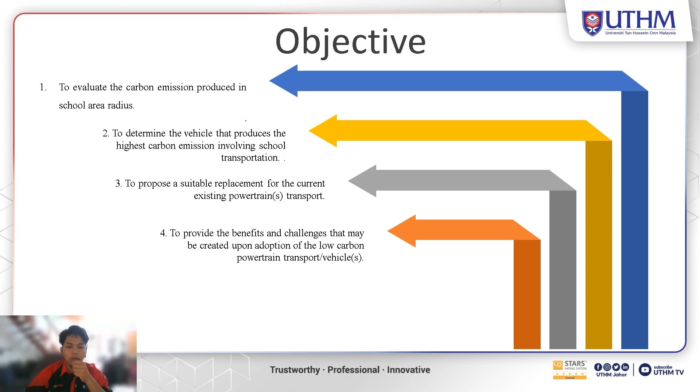Next, for the scope of study, the study focused on transportation practice at Sekolah Kebangsaan Pintas Puding located in Parit Raja, Batu Pahat, Johor. Data collection involved on-site observation and verbal interviews conducted during consecutive weeks. The specific observation periods were between 6:45 am and 7:30 am as well as 1 pm and 2 pm each day. These time periods were selected to capture the morning rush hour and the end of school hours.

The study focused on analyzing the daily transportation of approximately 40 children. The operating radius considered for the study is limited to the residential area of the school children, which is 15 km or less.

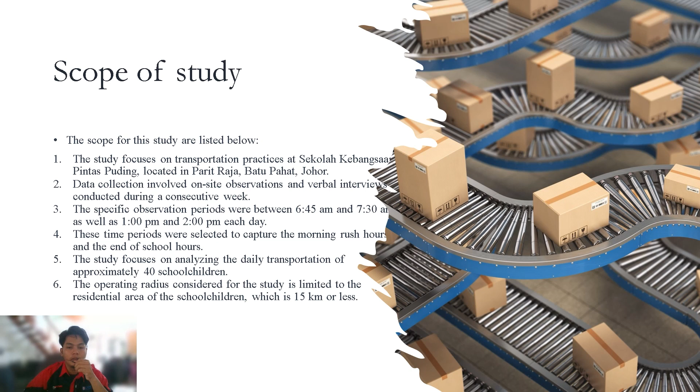So next, for the main findings. This chapter presents the main findings derived from the comprehensive data collection process conducted at Sekolah Kebangsaan Pintas Puding. The research project encompassed two parts, focusing on methodology of the study and data collection. The findings in this chapter lay the groundwork for addressing transportation challenges and formulating effective strategies to promote sustainable practices at Sekolah Kebangsaan Pintas Puding.

For the methodology, this research project has two parts. In part 1, the investigation focused on the transportation method used by the community for school children. Data will be gathered on convenience, distance, and availability of different modes of transport. Carbon emission will be evaluated considering factors like vehicle types, fuel efficiency, and traffic condition.

The study will analyze peak hour and end of the day carbon footprints, seasonal variations, and identify high and low emission sources. It will also assess the volume of polluting vehicles and factors influencing the adoption of cleaner transportation. Strategies will be developed to reduce carbon footprint, including alternative modes, carpooling, public transportation improvements, and incentivizing cleaner vehicles.

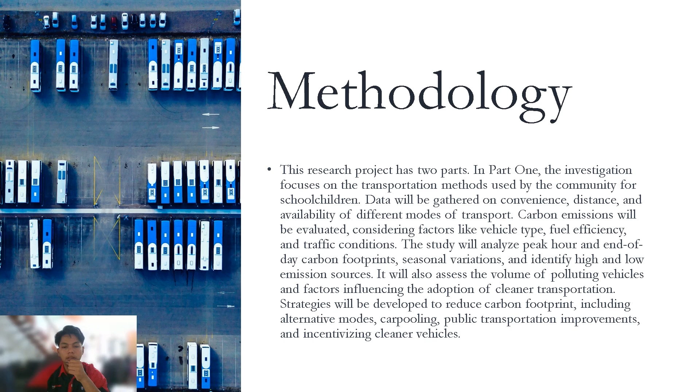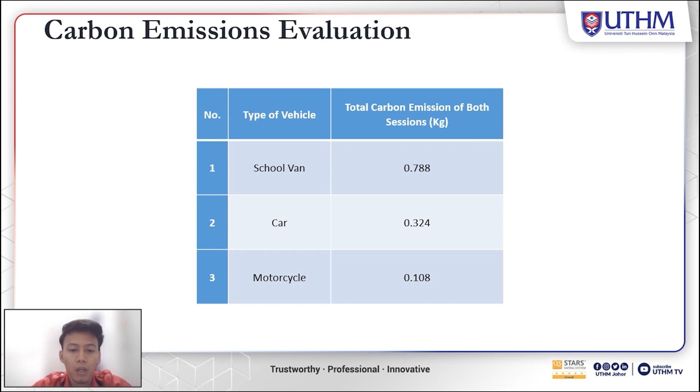I want to continue our group presentation, which is analysis. For carbon emission evaluation, for school van, the total carbon emission is 0.788 kg. For cars, 0.324, and for motorcycle, 0.108.

Composition of primary and secondary emission load from vehicles. For the fuel type of petrol, the chemical formula is C8H18. The primary emissions are carbon dioxide, carbon monoxide, nitrogen oxide, particulate matter, volatile organic compounds, and benzene and other toxic air pollutants. The secondary emission for petrol is ozone.

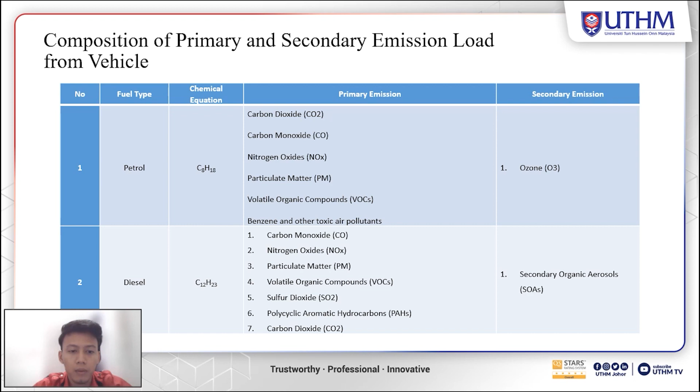For diesel, the chemical formula is C12H23. The primary emissions are carbon monoxide, nitrogen oxides, particulate matter, volatile organic compounds, sulfur dioxide, polycyclic aromatic hydrocarbons, and carbon dioxide. The secondary emission for diesel is secondary organic aerosol.

For carbon emission producer identification, a comparative evaluation of high and low carbon producers. For school van, total daily carbon emission is 0.788, and for motorcycle is 0.108. You can see the school van has the highest daily carbon emission while the motorcycle is the lowest.

It is because the school van is a larger vehicle which is multi-passenger. Higher carbon emission, consuming more fuel due to size and a less fuel efficient engine. Direct and indirect emissions from fuel production and distribution.

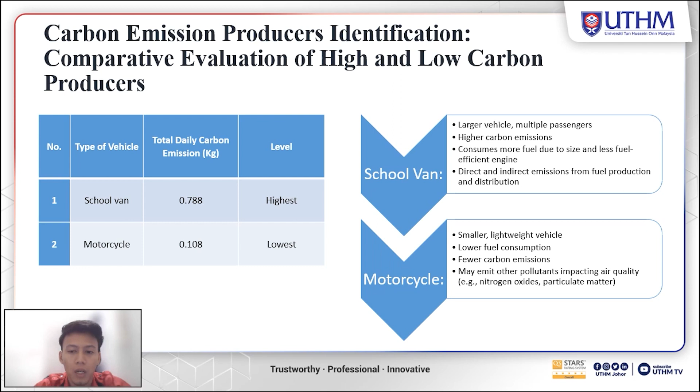For motorcycle, it is a smaller and lightweight vehicle with lower fuel consumption and fewer carbon emissions, but may emit other pollutants that impact air quality, such as nitrogen oxide and particulate matter. That's all from me, and then strategies for carbon footprint reduction.

Transition to electric vehicles, which are zero emission and battery powered, to reduce reliance on fossil fuels. Improve fuel efficiency, which is hybrids and PHEVs and efficient driving techniques. Promote sustainable transportation, which is public transport, carpooling, walking, and cycling. Smart transportation planning: mixed-use, compact urban design and intelligent traffic management. Support alternative fuels, which are biofuels, natural gas, and hydrogen.

And then infrastructure development, and eco-driving education and incentives: promote fuel-efficient driving and other incentives for low emission options. For vehicle maintenance and waste disposal, it is regular maintenance for low emission and responsible waste disposal.

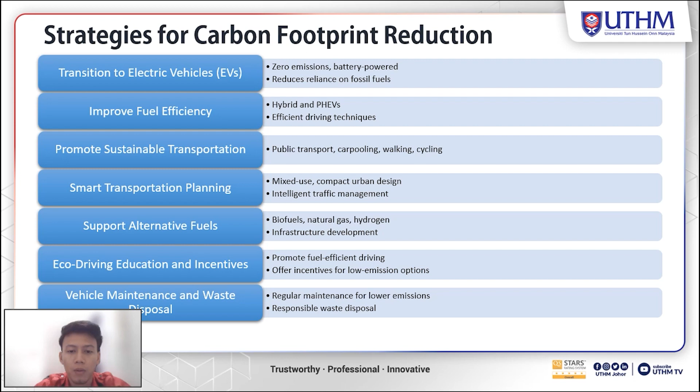I will continue to the discussion. For the analysis discussion, the data collected showed that school vans had the highest carbon emissions among the three types of vehicle considered, followed by cars and motorcycles. The school van produced total carbon emissions of 0.788 kg, while cars emitted 0.324 kg and motorcycles emitted 0.108 kg. This suggests that school vans, likely larger vehicles capable of carrying multiple passengers, contribute significantly to carbon emissions due to their size and potentially less fuel-efficient engines.

Next, the analysis also identified the potential for reducing carbon emissions through the adoption of alternative powertrains and sustainable transportation practices. Transitioning to electric vehicles (EVs) emerged as a key strategy to mitigate carbon emissions. EVs produce zero tailpipe emissions and rely on electricity, thereby reducing reliance on fossil fuels. Furthermore, improving the fuel efficiency of vehicles through technological advancements such as hybrid and plug-in hybrid electric vehicles can contribute to lower emissions. Promoting sustainable transportation options beyond individual vehicle ownership, such as public transportation, carpooling, and active transportation modes, can also reduce the overall carbon footprint.

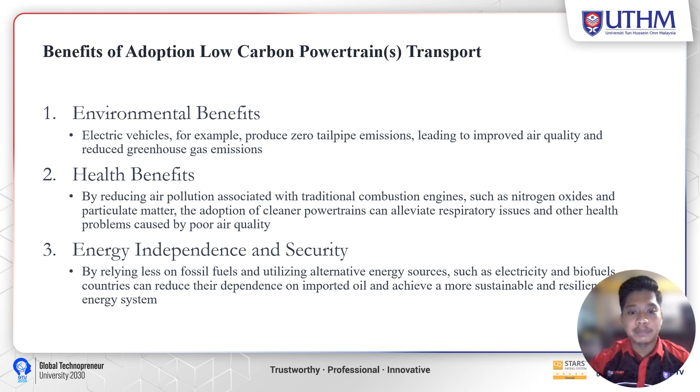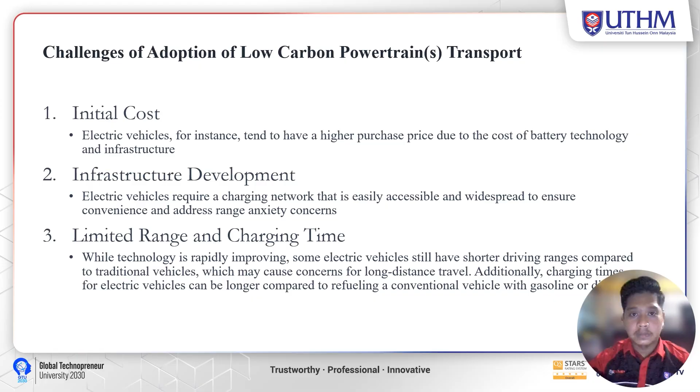So, in our conclusion, the analysis of carbon emissions in the school area radius provided valuable insight into transportation practices and their environmental impact. The findings clearly demonstrate that school vans, as larger vehicles, contribute the most to carbon emissions, followed by cars and motorcycles. This highlights the need for targeted measures to address the carbon footprint associated with school transportation, particularly by exploring alternative powertrain options and promoting sustainable transportation practices.

Then, the analysis further revealed that transitioning to electric vehicles and improving fuel efficiency through technological advancements are key strategies to reduce carbon emissions. By using EVs, which produce zero tailpipe emissions, and adopting hybrid or plug-in hybrid electric vehicles, the school community can significantly lower its carbon footprint.

Then, to effectively address carbon emissions in the school area, comprehensive planning and collaboration are essential. This involves adopting smart transportation systems, implementing urban design that prioritizes mixed-use development and compact layouts, and promoting alternative fuels. It also requires educating individuals about eco-driving techniques and providing incentives for adoption of low-emission vehicles. Therefore, the findings of the analysis highlight the importance of prioritizing sustainable transportation practices and exploring alternative powertrain options to reduce carbon emissions in the school area.